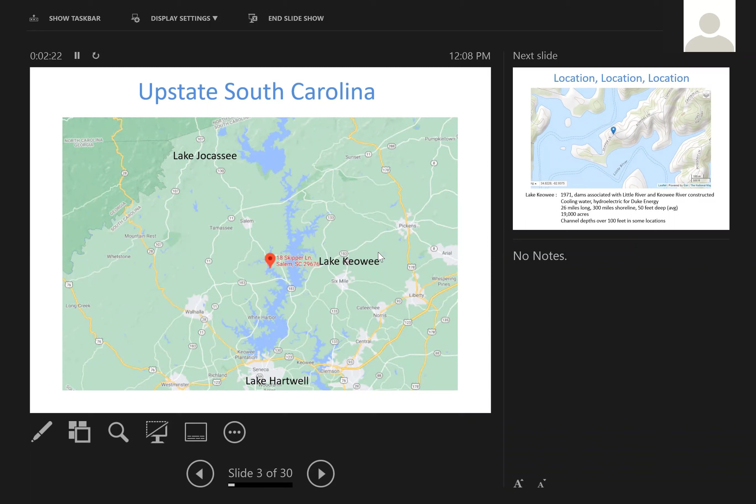So when you think about living on the lake or developing on a lake, it's all about location. So our project sits on a peninsula of land where you can see the Little River above and below our peninsula. So that river flowed from north to south. Essentially, the channel for the river abuts our property immediately to the north. You can see it wraps our property immediately to the west and to the south.

For those of you that need a little history lesson, Lake Keowee was established in 1971. They dammed up the Little River and the Keowee River primarily as a function of Duke Energy and their commitment for hydroelectric and then cooling water for Oconee Nuclear Station. The lake itself is quite long. It's the longest of the three lakes. There's 300 miles of prime shoreline. Average lake depth is 50 feet. It's almost 20,000 acres. And there's areas in the main channels that are over 100 feet deep. So you can kind of see where the site sits, some of the inherent challenges. Obviously, it's a beautiful piece of property, but certainly there's things to think through.

So the first residential development that was conceived, for lack of a better word, developers developed a piece of property there on the lake, a community called Keowee Key. So they built it, and sure enough, somebody capitalized on the opportunity for lakefront property. There's multiple properties on the lake that have experienced similar types of failures that we're going to talk about today, but we're going to focus on these three lots. This is just the original developer plat. So they're about a half an acre. They slope downward to the lake, basically from the road, as this paper would go from north to south.

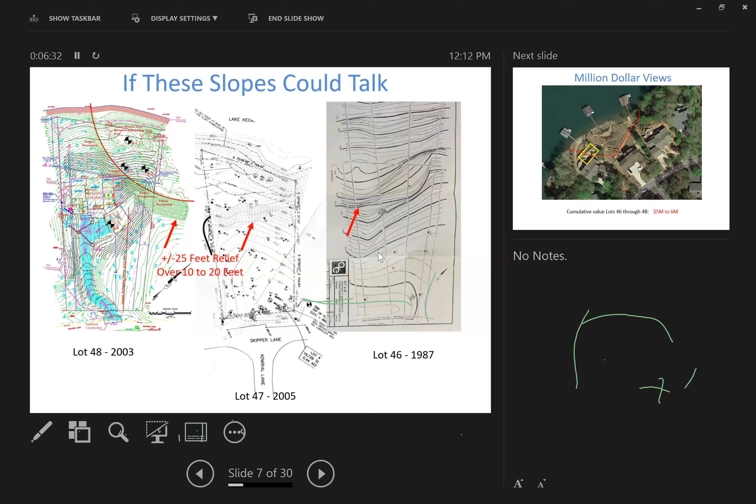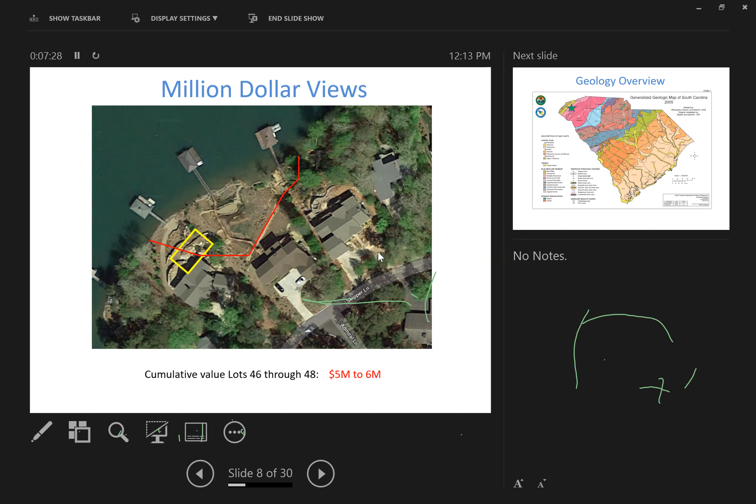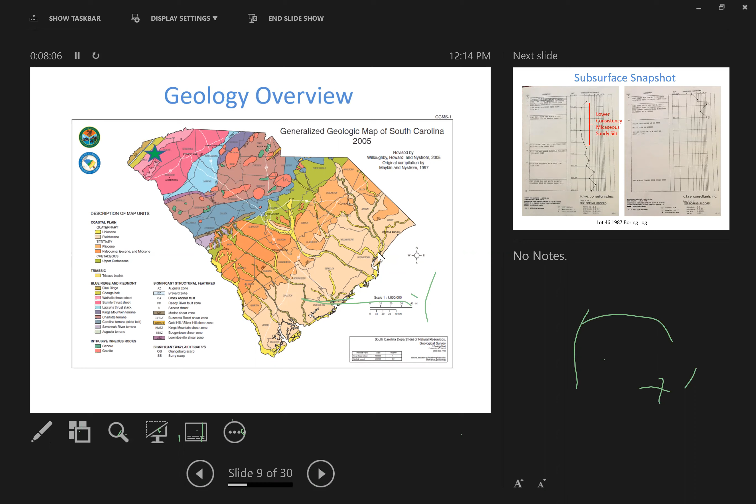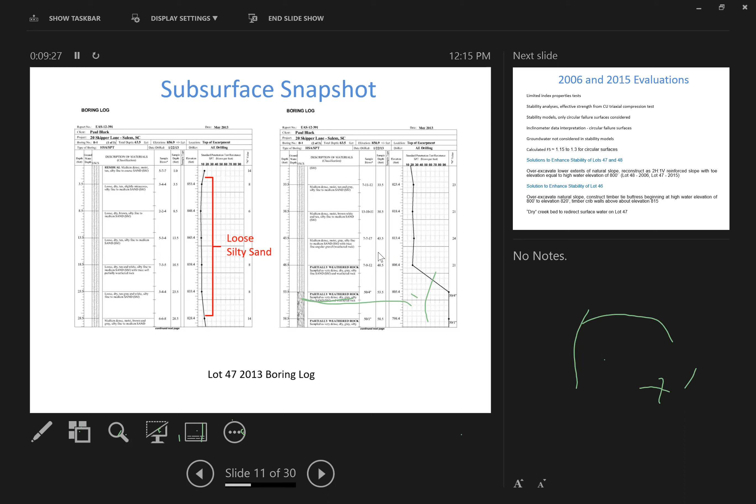Here's some borings that were done in 2013. These were done in association with the development of the lot in the middle, or lot 47. And again, you can see we've got almost 30 feet of relatively low blow count silty sand. So again, there's some repeatability as we go from lot to lot to lot. There tends to be this upper horizon. And what's interesting about that is these soils have a tendency to be somewhat on the drier side when they're sampled using hollow stem auger techniques. So that's another consideration, is how does that play into these evaluations.

So the properties in 2006 and 2015, which are lot 48 and lot 47, the one in the middle and the one on the left, those were evaluated by the same consultant who had done some work out there. And long and short of it, I won't get into the details, but their investigation basically included a number of borings, split spoon sampling, some Shelby tube stuff so they could run some triaxial compression tests to get shear strength parameters. They really didn't do a lot of index property testing. They put in some inclinometers because there was some indication, obviously, that there were some slope movements in the past.

And through their work over the course of this 9 to 10 year period, they determined that the factors of safety were marginal. Based on our review of the work they had done, they had predicted factors of safety of about 1.1 to about 1.3. All the files we reviewed demonstrated circular surfaces. And based on those analyses and their results, they developed some solutions to enhance the stability of the slopes.

So on lots 47 and 48, that's the one on the left, the one in the middle, they basically over-excavated the natural slope above elevation 800 and reconstructed that slope as a 2-to-1 reinforced slope. The first part of that work was done on lot 48 in 2006. That was the first property developed. And then ultimately in 2015, they replicated that effort and did it for lot 47. So essentially, they reconstructed the lower 20 to 30 feet of a natural slope as a reinforced slope.

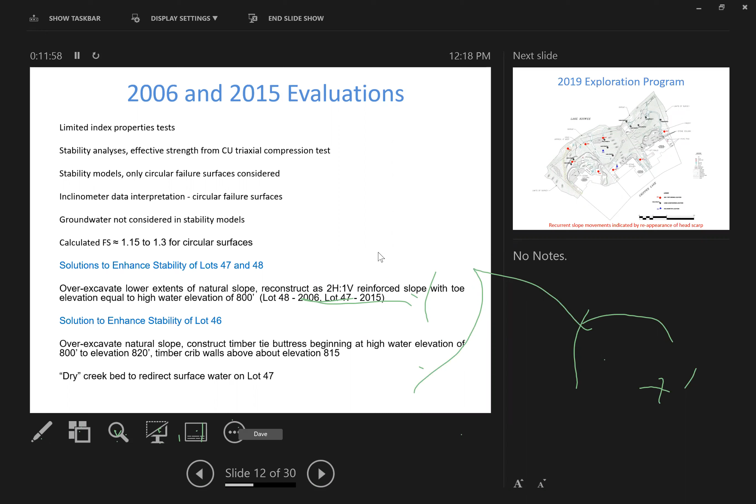So you can kind of get the idea of what's going on. They're thinking they're resolving some stability issues with some reinforced earth strategy, some buttressing. And then ultimately, we get a phone call. It was a referral from an attorney friend of mine in 2019. This was in the spring. And what had happened over the course of about 3 weeks, where I had superimposed that red line on the aerial photo, those original headscarps, what we call the upper extents of the failure, they manifested themselves again.

And unfortunately, at this point, the limits of the headscarp were very, very close to the northeast corner of the house on lot 48. They were very, very close to the back of the house on lot 47, and they were beginning to undercut and encroach upon a series of earth retaining structures that had been constructed on lot 46.

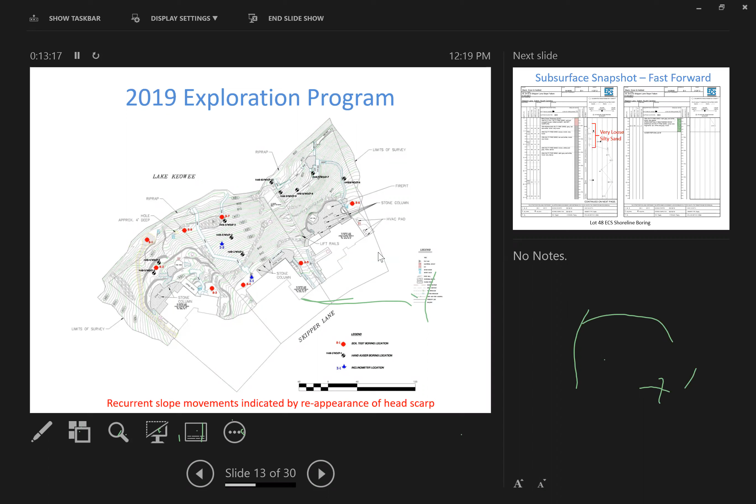So what did we do? We considered the data that had been previously collected. We went out and did a series of borings. Due to access considerations, we were able to get a track mounted rig across some of these areas. Otherwise, we had to do a lot of continuous wildcats, DCP type testing to try to identify consistency or relative density, and then took that body of work and were able to model conditions.

So what you see again, we found that same upper strata of low blow count sands, and what's really unique about these sands is they're relatively clean for Piedmont residuum, and we'll kind of get into that. But one of the oddities we noticed, the previous consultants in the borings they had done indicated groundwater conditions to be dry for the depth of their work. We had converted most of our borings to temporary piezometers, and we found that in fact the groundwater regime was up within the extents of the slope, or very near as you went to the toe toward the lake. Obviously, that's where the groundwater was. So that was something that obviously stood out as a difference in the 3 different iterations of evaluation.

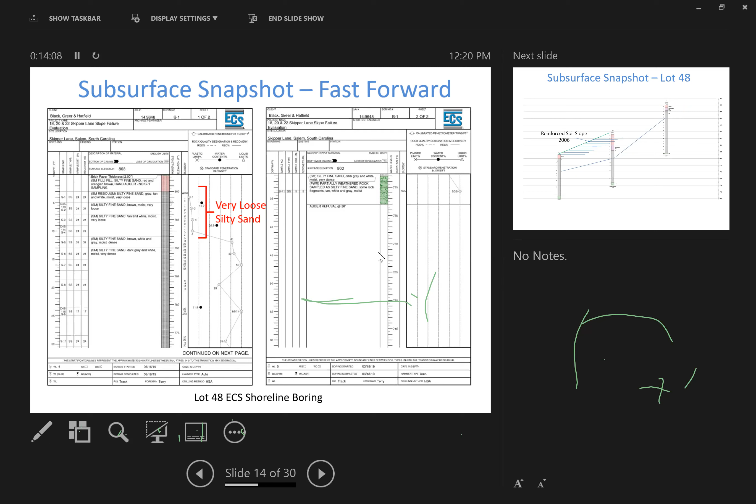So here's just a quick cross section, not to overcomplicate it, but you can see on lot 48, again, my crude drafting, what you've got is that upper strata of looser material. At the lower extents, that material was dug out and that reinforced slope was constructed. And you can kind of see it's planar in nature, the approximate boundary between those looser materials and the medium dense to dense residuum. It's pretty well defined. And that plane dips at about 20 to 26 degrees if you were to go crest to toe. So that boundary between those surfaces is fairly well defined.

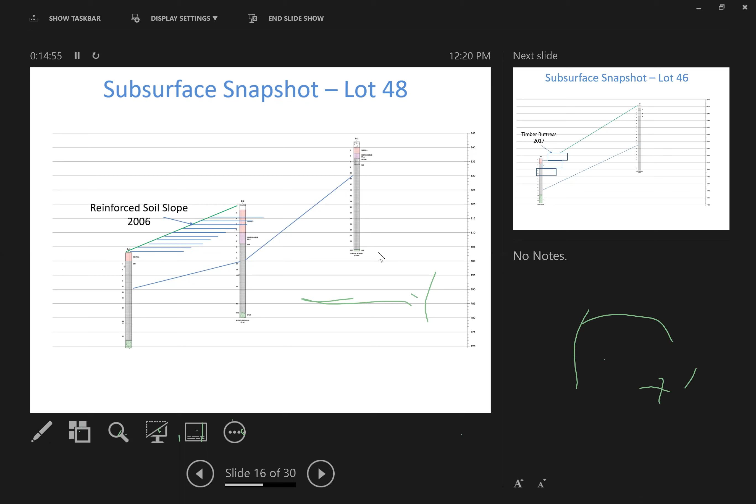It's consistent, it's repeatable. Here's what they did on the intersection of lot 47 and 46. In order to resolve stability problems, they basically buttressed the toe, thinking that would resolve an apparent circular stability concern.

And again, what you see is the repeatability in the inclination of the boundary between that loose material and getting down toward weathered rock. And I'll comment a little bit about the materials themselves.

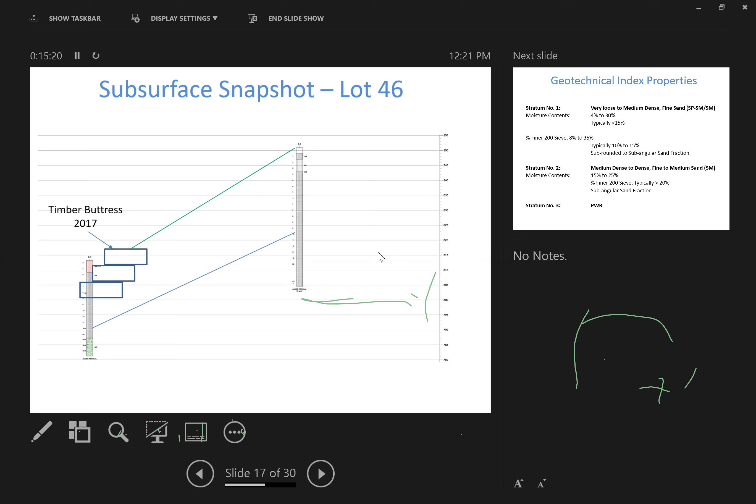It's kind of interesting. We don't see a lot of relatively clean sands out here, but we have natural residual soils that have fines contents in that 10 to 15% range. And that was typical. And what we saw is those upper sands, when we looked at them under a microscope, the grains were actually sub-rounded to subangular, which is somewhat interesting because typically we would see subangular to angular on our coarse fractions. Then you go to the underlying strata, more traditional, typically greater than 20% fines.

The sands were obviously subangular primarily, and then weathered rock. So what I would say here is the moisture conditions are somewhat unique, generally on the drier side where we're able to sample. The fines contents were extraordinarily low within that looser strata. And then that boundary is extraordinarily well defined between those materials and then stratum number 2 and stratum number 3.

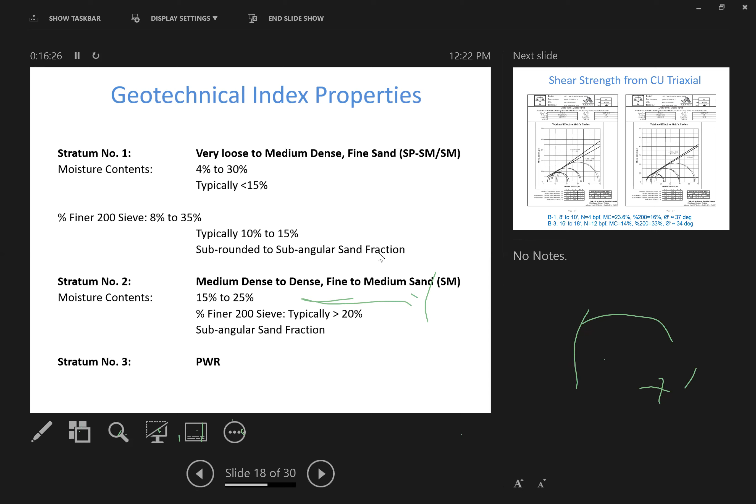So as any good geotechnical professional would do, we were fortunately able to get some relatively good UD samples, even in those sands. So it took some time, and we pushed a number of tubes and got surprisingly good recovery. So to work backwards, obviously, we ran some CU triaxial compression tests to get a feel for what we were dealing with. And to summarize, there's some consistency.

Those lower blow count materials, 4 blow material, about 16% passing the 200 sieve, had about a 37-degree effective friction angle. Maybe a little bit higher than published correlations, but controlled environment. I know it's a little sliver out of a Shelby tube test, but not necessarily unreasonable.

A deeper sample from a slightly more dense residual material at a lower moisture content obviously had a little bit more passing the 200 sieve, and that friction angle was comparable at 34 degrees, and that's the effective. And you can see there's not a significant difference due to the grain size characteristics versus the total stress state and the effective stress state.

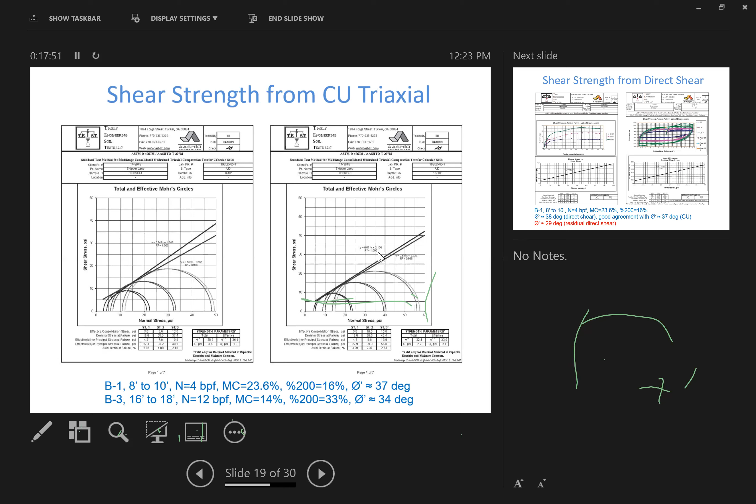So in looking at this, we went through and performed some analyses and tried to figure out what is it we should be modeling. And since we knew from our work that this slope had experienced recurrent movements, and when I say that, the first documented movements were in the early 70s, shortly after the lake was filled. Then we had other movements that were noted and recorded in the late 70s. Then we had additional movements that were noted in the late 80s, in the 90s, the early 2000s.

So the question then became, with each progressive movement, how do we account for that in our modeling? So we said, okay, if the materials move and with each movement the shear strength is reduced to some extent, how do we do that? So we ran basically some residual direct shear, and we ran that on the same sample we ran the CU triaxial test on. So if we think about how that might compare, the direct shear results could generally be considered

consistent with the effective strength parameters on the CU test. So we got 38 degrees from the direct shear on the sample, which is excellent agreement. Whether we were lucky or not, or whether the materials are that homogeneous throughout that sample we took, I don't know, but we had very good agreement in terms of direct shear versus effective shear strength from the CU test.

Then we cycled the material as you would in a residual direct shear, like you might consider for slickensided clays or materials that have inherent natural flaws. And what we found is in that cyclic residual test, that friction angle drops considerably. So we've got about a 25% decrease in shear strength if we consider we're replicating those movements in a controlled environment. So we go from about a 37 or 38 degree effective strength parameter down to 29 degrees. So we need to think about, okay, how does that impact what we're doing?

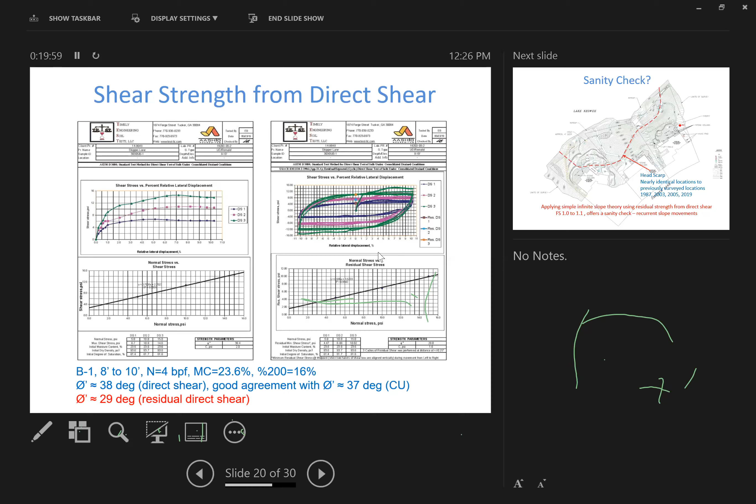So what we did is we had an as-built done. We retained a surveyor to go out and do an as-built so we could field locate where that headscarp was. We were able to overlay that with the previous topographic drawings I showed you. And sure enough, where this new slide manifests itself is not coincidentally in the same place as the original slides and failures. So again, I talked about timeline and timetable.

There's nothing unique about this. And to really simplify it, if we think about what I had said before, we know that the boundary between those looser, less dense materials and the underlying strata that's more competent residual, more weathered rock, if you just apply an infinite slope theory and we use the strength parameters from the residual direct shear, we get a factor of safety that's approximately unity. So it's close to 1, and with some manipulations in groundwater table and things like that, maybe maxes out at about 1.1.

So maybe that was a good prediction. Maybe that was a good way to consider how this slope might behave in the future. So we used that residual data as part of our modeling process. And we were able to really drill down and get a better understanding of what was going on and why.

So everybody, as part of a presentation, you guys want to see dead bodies, you want to see the chaos, and you want to see the repercussions of maybe the misdiagnosis or the poor predictions. And when we arrived on the site, this is what we were able to see. It was obvious that, in fact, the slope had begun to move again. The ground distortions were significant.

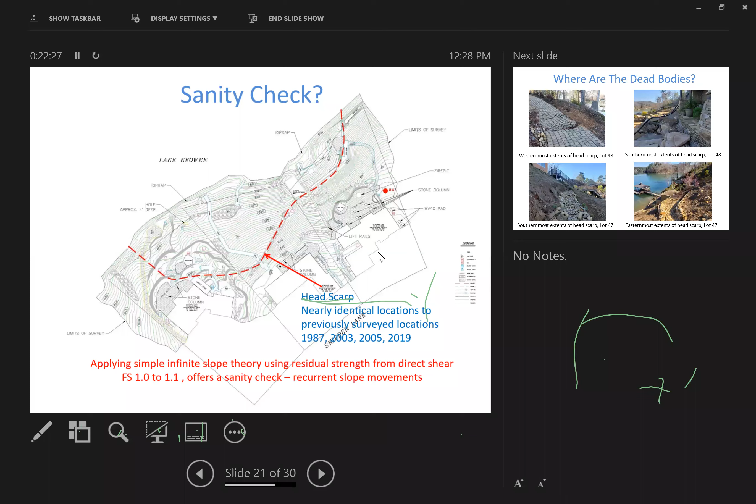The picture in the lower left, and I'll go back to the slide before, is about where that arrow is pointing on lot 47. So the middle lot, and I talked about this idea of a dry creek bed to divert surface water. Unfortunately, the dry creek bed wound up being constructed over the upper extents of that headscarp. And the vertical distance at that location, and again, the slope is taller, there's more demand, more driving force. The vertical distance of that headscarp is almost 5 feet.

And then on the lower right, this is looking across toward lot 46. And in the middle of that photo, you see what I talked about was this buttress or these stacked planter boxes. And again, that buttress, the intent there was to provide resistance to those driving forces, with the circular surface being considered. And you can't see it well in this picture, but the headscarp is basically cutting through the center of this photograph. So there's some small timber crib walls, and the headscarp is beginning to undercut those upper crib walls.

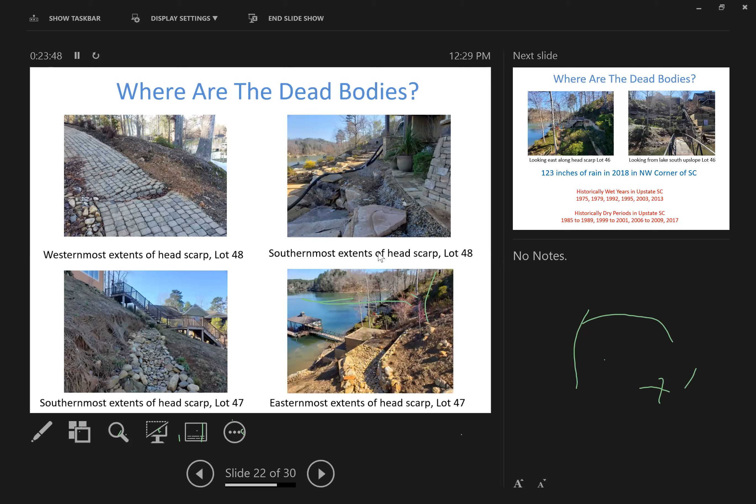So this is what we saw. Obviously, this is not a small failure. It's consuming 3 lots. The distance of the headscarp is pushing about 800, 900 feet. So the solution, obviously, that's the thought-provoking part, is how do we do it? And what these pictures represent is all of that existing infrastructure. How are we going to stabilize these massive slopes? So from the road down to the lake is about 90 feet on average. So it's a significant mass of earth.

You know, we can't underestimate Mother Nature in this. Yeah, the slope's moved. It's moved quite a bit. It's impacting infrastructure. It's encroaching very close to these $1 million+ homes. And there's a fishery about 8 miles from this site that recorded 123 inches of rain in 2018. So fast forward to us getting a call in April of 2019. You can see that this wetting phenomena, very extreme. Our normal rainfall in the upstate is about 48 inches a year. So we had almost 3 times that in the vicinity of the project.

And then we looked at historical data, and you can see we've had historically wet years in 75, 79, 92, and on and on and on. It's not coincidental, I don't think, that these slope movements occur generally within the historically wet year or shortly thereafter. And then we've got cyclic historically dry periods. So we go through this cycle, and the slope moves, it reaches about unity, it sits still for a while, and then those movements are re-engaged.

So again, we start connecting the dots and we look at not only what's below the ground, we look at what's happening atmospherically. And that lake level, just so you guys may have some questions, does that lake level rise and fall significantly? Not more than about a foot or two historically. So the rise and the fall of the lake level really has very little impact necessarily on the stability of these slopes.

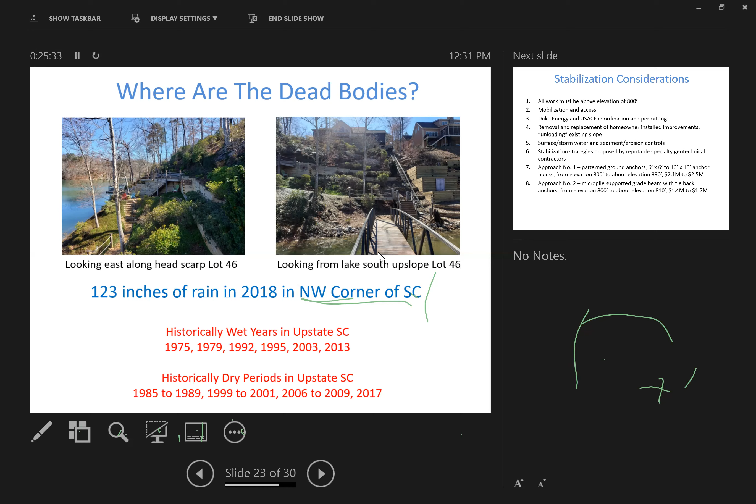So how did we think through this? What were we going to do to help these people maintain the value of their asset, restore the safety of their property, eliminate those risks? These are all people that are retired or near retirement. This was sort of their dream home. What would they leave their kids?

Due to some restrictions by Duke Energy and the Corps, all of the repairs have to be initiated above elevation 800, which is the high water level for the lake. So if you think about that slope, and I didn't share this with you, but from the crest of that slope out to the channel, there's about 170 feet of vertical relief. So the channel was deeply incised right in front of our property. And if you recall, that's where that sharp 90-degree bend to the west is. So you can see that river's been just cutting and cutting and cutting away at the toe of the slope.

So we couldn't get out in the body of the lake. There wasn't a stabilization strategy to start out and do some kind of crazy underwater repair. So we're limited to starting at the shoreline and above. Some of the first things we had to do to improve the stability of the slope just for the construction of the improvements, all of these guys had built rockery walls and other things that were putting demands on the slope, for lack of a better word, surcharging.

So the rockeries had to come down. Those timber crib walls had to come down. Anything that was putting an additional demand on the slope ultimately had to be removed. So that was done in the summer of 2019 in anticipation of the repair ultimately being accomplished. The value of the removed improvements alone, just these rockeries and little ponds and whatnot, they had over $800,000 cumulatively in landscaping improvements across those 3 lots. So that was money that was unfortunately just wasted.

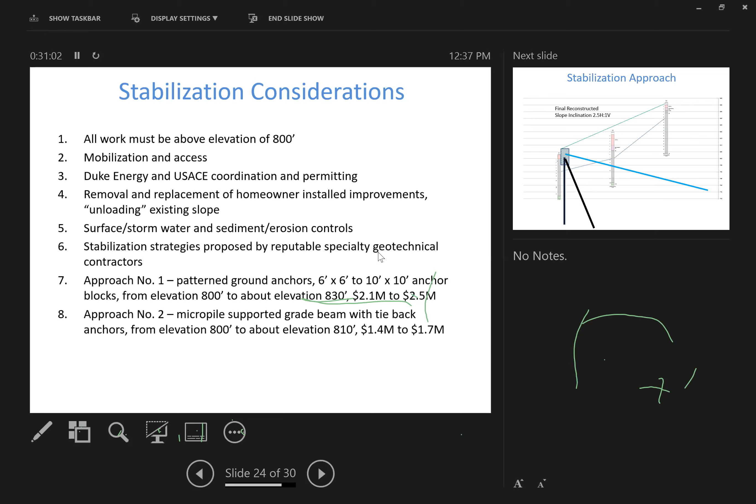So my crude drafting skills, again, what you'll see is I've superimposed a cross section essentially that runs down approximately the center of lot 48, and the grade beam is down near the shoreline. The black lines represent the micropile. So you've got the vertical pile in the front, you've got a batter pile that's being loaded in tension that's installed at a batter, and then you've got these insanely long tieback anchors that go a significant distance, upwards of 60 to 100 feet, depending on the geology and that rock interface.

And then that entire mass is retained by this system, this micropile supported tied back grade beam. And then above that, they'll reconstruct the slopes at a 2.5 to 1 horizontal inclination. The design accounts for some surcharge loadings. I don't know what was ultimately resolved. Most of the homeowners are not going to put back the rockeries and the patios and the ponds and the timber crib walls. They're done with that. So they're just going to have a grass slope down to the lake. So conceptually, you can kind of see the solution here in section view.

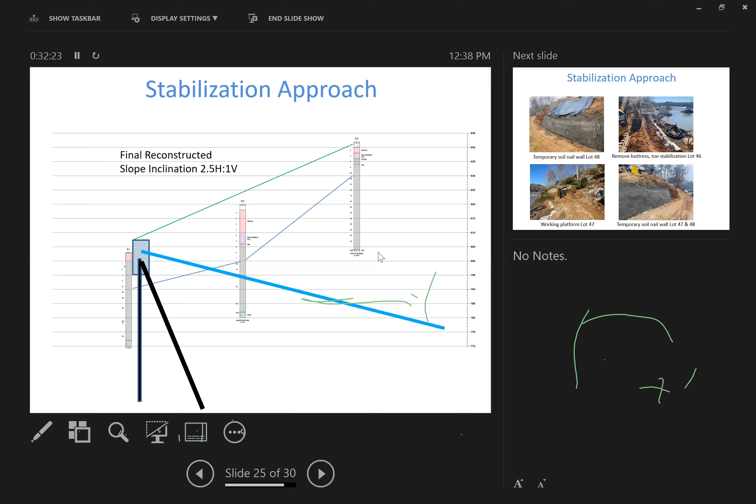So they've actually just started this project, so I don't have a lot of sexy pictures yet. But essentially, to build the area where the grade beam and the micropile installation needs to occur from, they've got to create a bench. And you can see the access is extremely limited. So they're bringing equipment in some cases by barge. In other cases, they've created a road around the western extents of lot 48. And they've had to remove the toe of the existing slope. So there's a temporary soil nail wall there so that they can safely access that shoreline.

They've had to buttress the shoreline with some additional gravity mass elements. So you've got some large, for lack of a better word, gravity type segmental block units down along the shoreline, additional riprap protections, sort of to buttress that toe below the bench. And then that's continuing. So they're nailing basically from west to east to establish that platform.

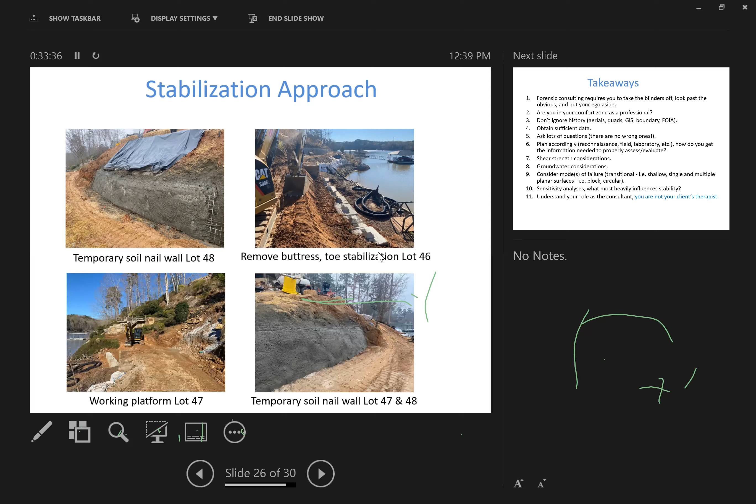So again, it's challenging, and you can see access is horrible. The lake is close. The amount of infrastructure that had to be removed and disturbed. You can see the big, beautiful buttress is removed. So all of that collective effort is kind of where they are now. And hopefully this project will finish this summer, and we'll be able to update this presentation with all the good stuff.

But to kind of close this thing out as we get close to time, the takeaways, I guess, for anybody in the civil discipline, whether it's structural, general civil, geo, when you get called in to look at something that's not performing like it should, or maybe it's underperforming like this slope was, you really got to think through the obvious. You got to take the blinders off. You got to lean on your peers. And absolutely, you better put your ego aside.

We might all think those initials behind our name mean something, but I will say you'll be challenged, you'll be humbled, you might even be humiliated at some of your first attempts. But forensic work requires a lot of out-of-the-box stuff. And then I guess the second question we talked about, are you in your comfort zone? Is this the type of project you and your firm would even want to get in?

We know residential work typically, not to make this a business discussion, but it's hard to collect money. Things get crazy. You got multiple homeowners. Everybody's got a different mindset. But do you want to get into this? And is it something you feel comfortable with, either as an individual or your firm?

I can't stress enough, when you've got a project where something's underperforming or maybe has actually failed, where you've got such a history, you've got to ask these questions. You've got to round up all the historical stuff you can. So it's online stuff, it's FOIA requests, it's talking to homeowners, talking to the HOAs, and I'll get into that a little bit at the end. You've got to get enough information. Usually you get one bite at the apple to get what you need.